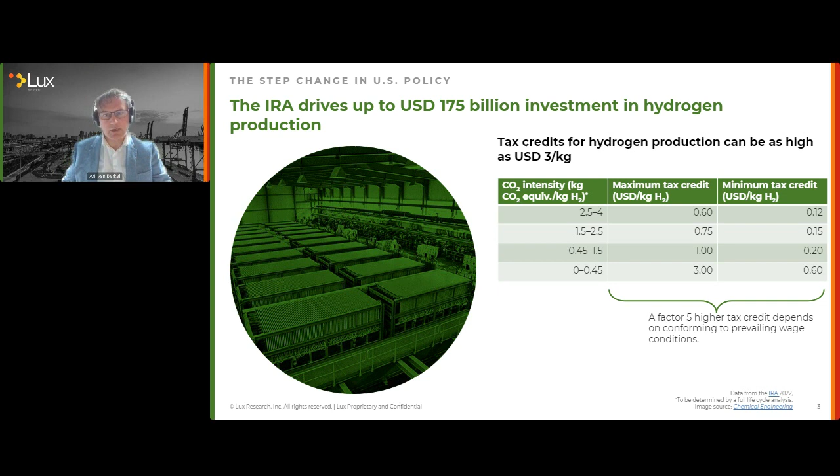Now, these numbers have been studied, for example, by the REPEAT project, which is a project at Princeton University. And they estimate that this could drive up to $175 billion of investment in hydrogen production. Now that's all nice, but of course we want to know how much hydrogen that actually amounts to. Well, to get to such a low CO2 intensity, you have to source renewable energy for the hydrogen production. And of course, you can source that from, say, solar, which would get you a capacity factor for hydrogen production of maybe about 30%, 35% if you're lucky.

Or you could source it from hydropower, which could get you capacity factors even exceeding 80%, but I put 80% here on the slide. So you can see roughly what kind of annual production of hydrogen that investment could amount to. If everything is connected to solar, it would be roughly 10 million tons of hydrogen. If everything would be connected to hydropower, it would be 28 million tons of hydrogen. In reality, it will be somewhere in between, let's say, 15 to 20 million tons of hydrogen. So the US, through the IRA, is set to deploy capacity for about 20 million tons of hydrogen per year. And that's low carbon hydrogen, so not the gray hydrogen that's already being produced.

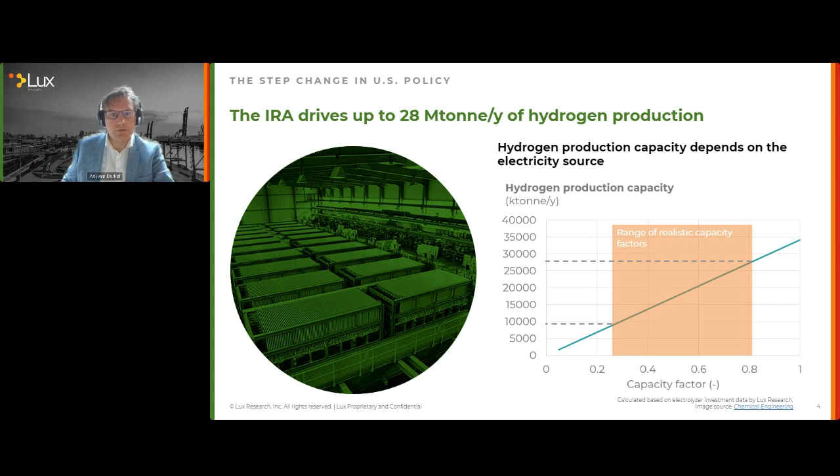So what about the EU? Well, the EU had a policy called Fit for 55, which was designed to create demand for at least 7 million tons of hydrogen by 2030. And you can see roughly how that demand is broken down here.

Following the war in the Ukraine and the need to have an accelerated energy transition in the EU, at least that's how the need to be less dependent on natural gas, and specifically natural gas from Russia, was interpreted in the EU, Fit for 55 was upgraded to the Repower EU package.

And Repower EU aims to create demand for about 20 million tons of hydrogen per year by 2030 across the EU. You'll notice that there's a big portion other, which could also mean we don't quite know yet where this additional hydrogen demand will come from, but we'll figure it out by 2030.

So if the EU needs 20 million tons of hydrogen, where does it get that? Because hydrogen, and the reason back in 2006 the hydrogen economy didn't happen, even though people were fervently working on it, hydrogen has a chicken and egg problem. There's not enough supply of hydrogen because there's not enough demand. There's no investments in demand for hydrogen because there is no supply being announced.

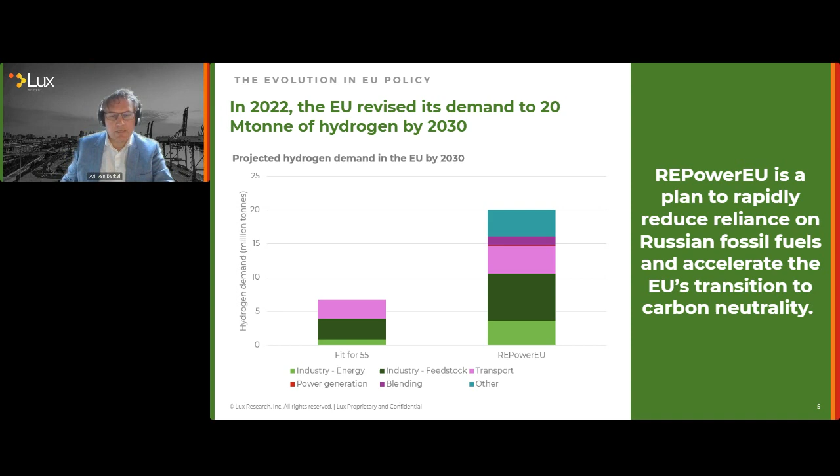So where does the EU get the 20 million tons? Well, originally in Fit for 55, the plan was to just generate hydrogen within the EU, local production. And 7 million tons of hydrogen production within the EU is not crazy. It could be done, for example, using North Sea offshore energy. However, 20 million tons of hydrogen per year is a little bit crazy for EU terms.

The EU needs hydrogen because it needs to import renewable energy. And therefore, the 20 million tons will, according to Repower EU, come 10 million tons produced locally within the EU and 10 million tons produced outside of the EU.

And now you can see that the EU is also working to close all sorts of agreements with other nations, nations that have a lot of, for example, solar or wind potential, in order to create terminals and import capabilities for hydrogen from those countries. And you could think of countries like Saudi Arabia, Australia, Chile, all of those kind of nations.

The EU does, however, want to export electrolyzer capacity. So it also wants to generate its own capability to manufacture electrolyzers so that even when hydrogen is being imported, the EU can still be the supplier of the equipment.

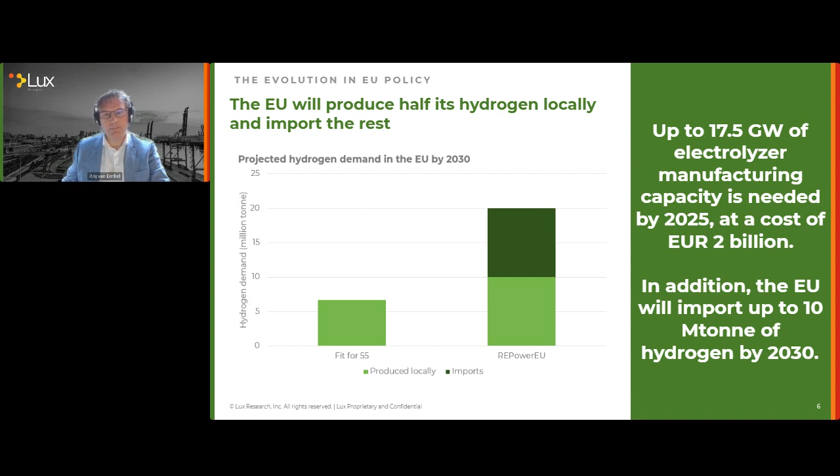And just to give you an idea about the local production within the EU, there are places like Spain and France that have abundant solar energy and wind energy. You will notice that both Spain and France have long coastlines and have a lot of ability to deploy offshore wind energy as well. But obviously, if you've been there maybe on a vacation, you know that Spain has more than enough solar potential as well.

Heavy industry in Europe is concentrated in a band that runs from northern France and the Low Countries through Germany to northern Italy, roughly. That's where there's a big concentration of heavy energy intensive industry historically and still today. So you'll see that the heavy industry band will be importing from other places in Europe, for example, from France and Spain.

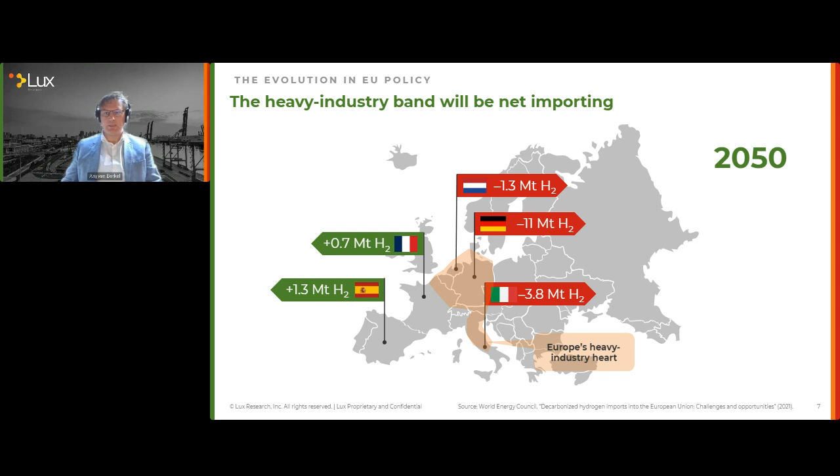And that's actually already being deployed right now, as there's a project called H2Med, Med for Mediterranean, which is building 2 pipelines with a combined length of about 700 kilometers to move hydrogen from Spain through France and towards Germany, and also from Portugal.

And it's not hard to imagine that that pipeline could cross the Mediterranean and get into Morocco, for example, and start also using the solar potential in Northern Africa. And that's an active debate as we speak right now. You may have heard about the deal with Tunisia about migrants that the EU closed. In those conversations, renewable energy plays a role as well.

So the EU and the US are on very similar tracks when it comes to scaling hydrogen, of course, for very different reasons and with very different instruments. And that's important to note, because you don't know if the capital that is required is actually being mobilized, right? These are plans. Now the governments need to create private sector funding for these plans.

And the US is doing that through a tax credit, which is simple, but not very flexible, but very simple and very easy for companies to understand and to count on. The EU is doing more complicated things, more open-ended, which means that it's much more flexible in terms of which technology gets deployed, but also it's much harder to mobilize private sector funding that way.

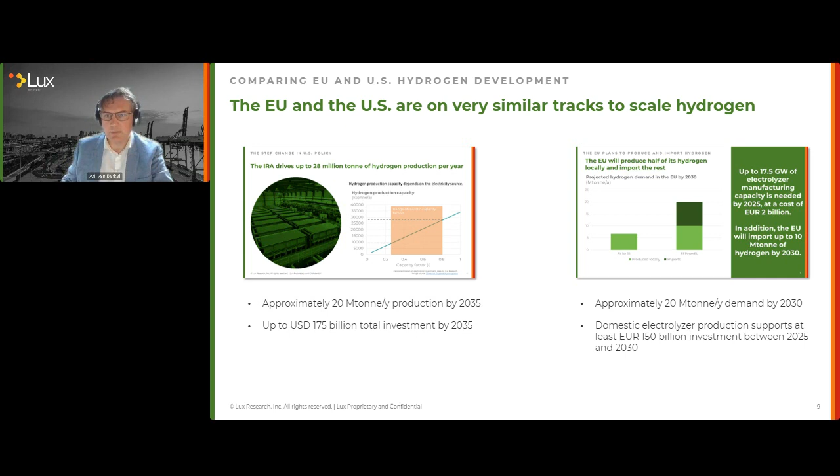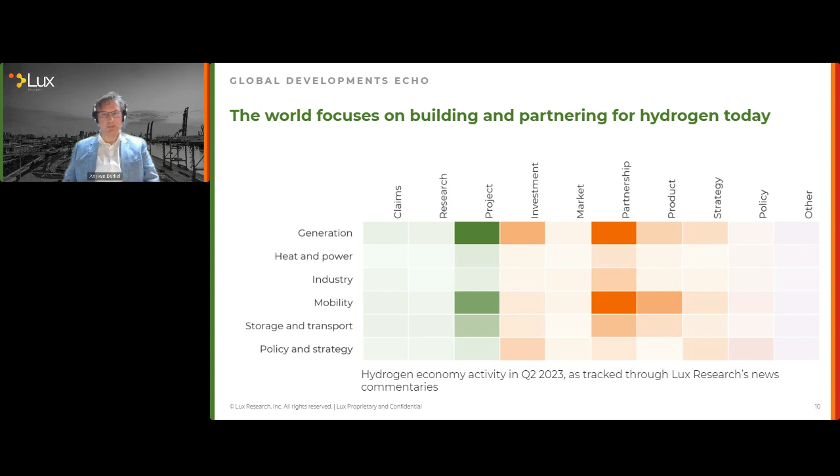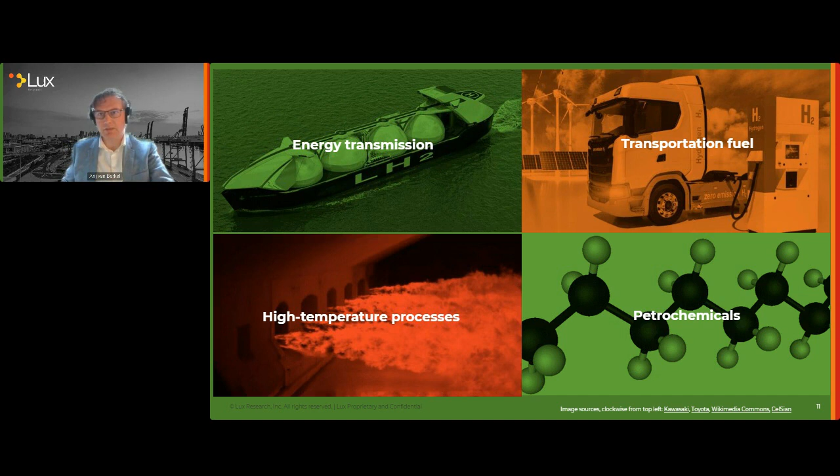We'll spend the rest of the webinar discussing that, and we'll look at four generic types of applications: energy transmission, transportation fuels, high temperature processes, and petrochemicals, and they're connected. So I won't make a clean break between all of these applications. I'll try and give you some structure, but you'll see that they're fluid. These are not clearly separated application areas, as you'll see in a moment. And we'll start with transmission.

Now, transmission is important because a place like the EU as a region needs to import renewable energy. It doesn't have enough renewable energy potential to generate all of the energy it would need for its current economy within the EU itself. And the same applies to Japan and South Korea, for example, and to a lesser extent to China. So it's important to move renewable energy around globally, and one of the main ways to do that would be hydrogen. But even if you're not looking at that, it's still important to transmit energy and to have a way to concentrate energy.

Fossil energy, whether it's a power generation plant, a combined cycle gas-fired plant, for example, or just a burner of fossil energy, like a massive glass furnace, those types of installations typically have a power density of about 1 gigawatt per square kilometer. Heavy industry, like a steel mill or a refinery, consumes roughly 50 megawatts per square kilometer. And that's never a problem because fossil energy provides a very dense source of energy.

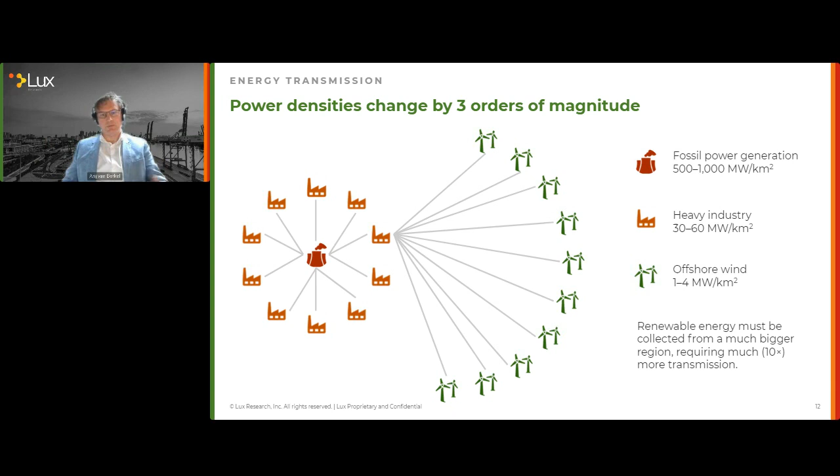Another way to look at it is to look at land-dependent industries versus just fossil-dependent industries that do not depend on any significant land space to produce the energy and the raw materials. So if you look at ethylene production, which of course is completely a fossil industry product, this is one of the cracker sites in the Netherlands. It processes about 1.5 million tons per year of carbon, right? 1.8 million tons per year of product.

If you look at a paper mill, and especially a pulping mill that processes wood, and therefore has a raw material that needs to come from the land, it processes about 122 kilotons per year. So about a factor of 10 less carbon per year, and 250 kilotons of product per year. And of course, the product is more because biomass tends to have a higher oxygen content.

Potato starch, very similar. It comes from the land. It is a highly efficient crop, but still the carbon processed is only about 270 kilotons per year, which is still a factor roughly 5 less than what you get with a pure fossil production unit.

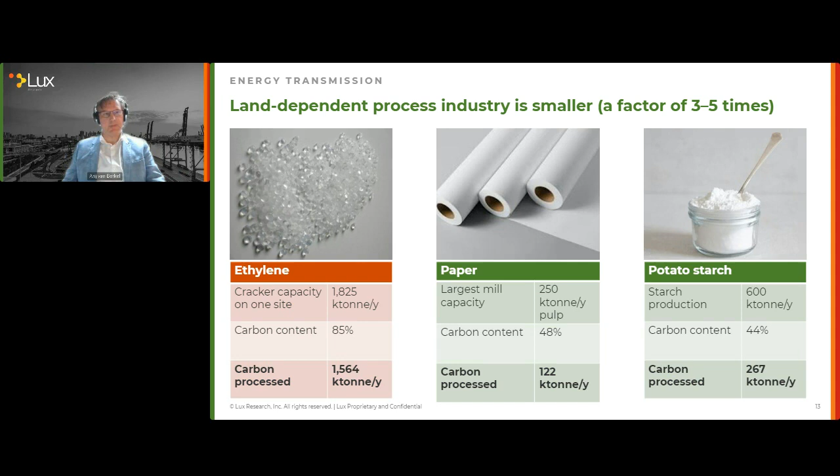So one way to concentrate is to use the existing natural gas network. And here's an example of a company called DiviGas that's developing a way to introduce hydrogen into the natural gas network and selectively take it out again at the point of use. So in this case, they develop hollow fiber membranes. So you can blend hydrogen into the gas network. Today, it's considered safe to do that up to about 20%. And then you can take hydrogen selectively out at the point of use.

Now, they're not quite at 20%. They can go as low as 35% today, but they're working to improve the technology. And meanwhile, the gas grid operators are working to increase the safe limits for blending hydrogen.

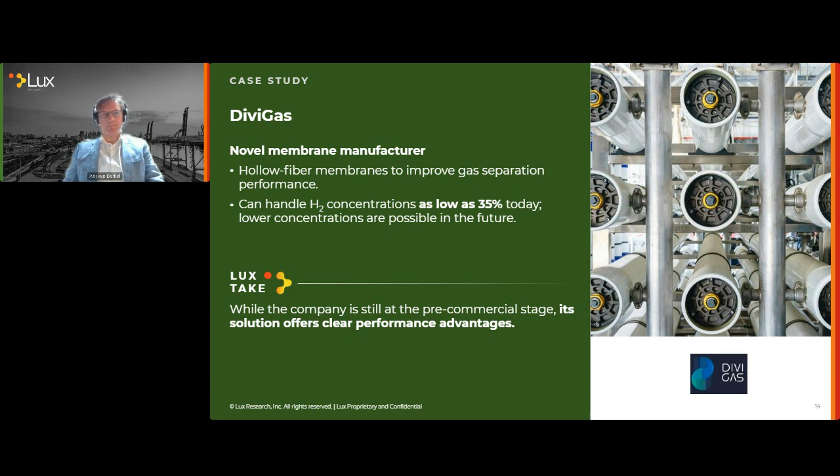So, getting back to the global trade, how would the global trade work? Well, you need a carrier, you need a way to move hydrogen around. And currently, the most considered carriers are liquefied hydrogen, so cryogenic, ammonia, or liquid organic hydrogen carriers, also known as LOHCs, which I used here because that's a lot shorter to put on a graph, of course. And as you can see, the cost of transporting hydrogen through any one of those carriers is pretty much the same. So there's not really a technical answer to the question which carrier is better.

So at the end of the day, we believe that really this is a standardization problem. The first terminals that get built at a large scale will be setting a standard for the hydrogen carrier. So if the first terminals happen to be cryogenic, then liquefied hydrogen stands a good chance of scaling and becoming the carrier of choice. On the other hand, if liquid organic carriers are the first terminals to be built at scale, then that particular carrier has a good chance of becoming the carrier of choice.

Ammonia is special because, you can see that the cost of turning ammonia back into hydrogen is significant; it is roughly half the total cost of the carrier. So if you could use ammonia as is, without having a particular desire to turn it back into hydrogen, it could be much cheaper. And this puts ammonia at an advantage.

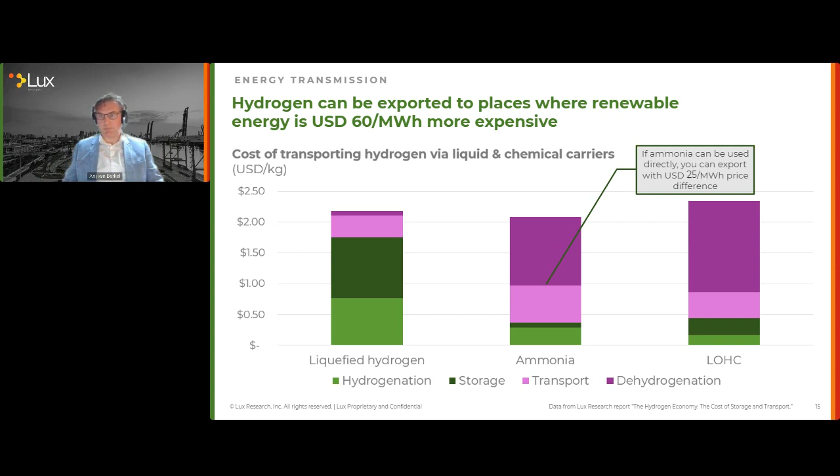So a lot of people are already working to make use of ammonia directly in an engine. And of course, that's the largest group of people. And you should imagine those could be large marine engines, for example, two-stroke engines. Using it in a turbine is not so easy, because in a turbine it's very difficult to handle the NOx emissions, or in direct fuel cells.

And of course, people are also working to burn ammonia. And burning ammonia without excessive NOx emission is actually possible and not even very expensive to do. But you do have to have a very good understanding of the combustion process.

So that brings us, and I told you, things are blending a little bit. So now we're moving over to high temperature processes. And what you can see here is a US 2018 census on energy use in industry. And you can see energy use broken down here by the typical temperature range that the industry uses. So for example, glass manufacturing uses a temperature above 1000 Celsius. So it's in the ring at the top left of this picture, the over 1000 Celsius ring, together with steel and cement manufacturing, for example.

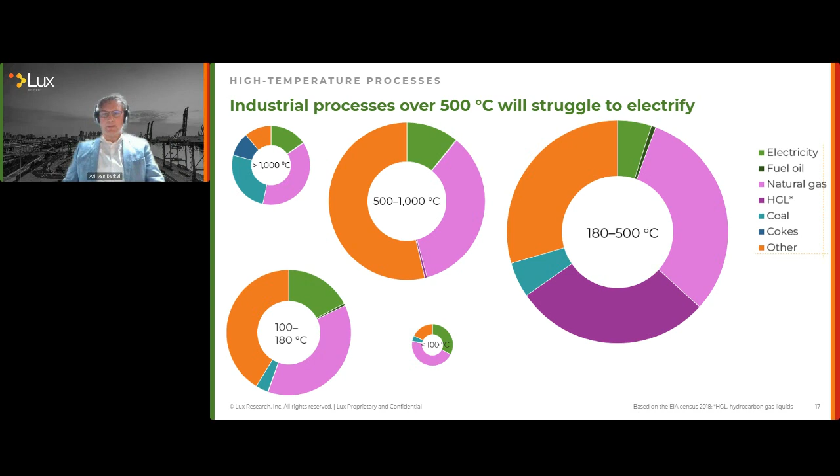Roughly 75% of industrial energy use in the US, and I think that's pretty representative for global energy use as well. That's industrial energy use, not all energy use, occurs in industries that require very difficult, like over 500 Celsius, or somewhat difficult, like between 180 to 500 Celsius, to electrify heat. And therefore, burning ammonia to generate heat, for example, or burning hydrogen to generate heat is a relatively accessible, early potential application of hydrogen at a large scale.

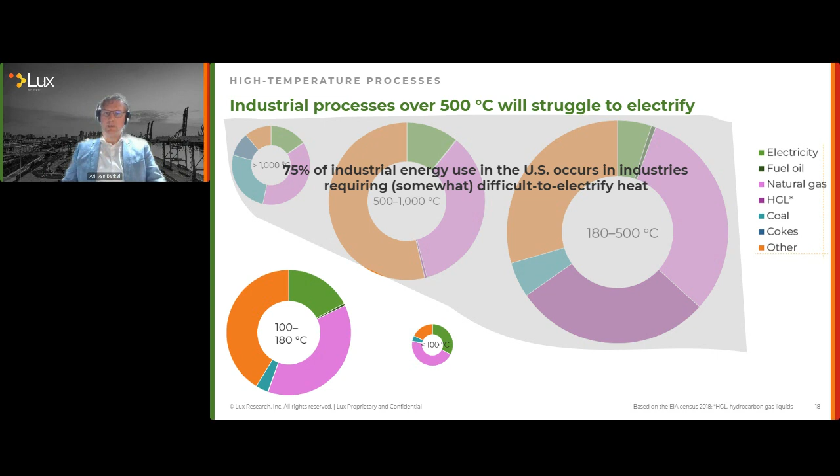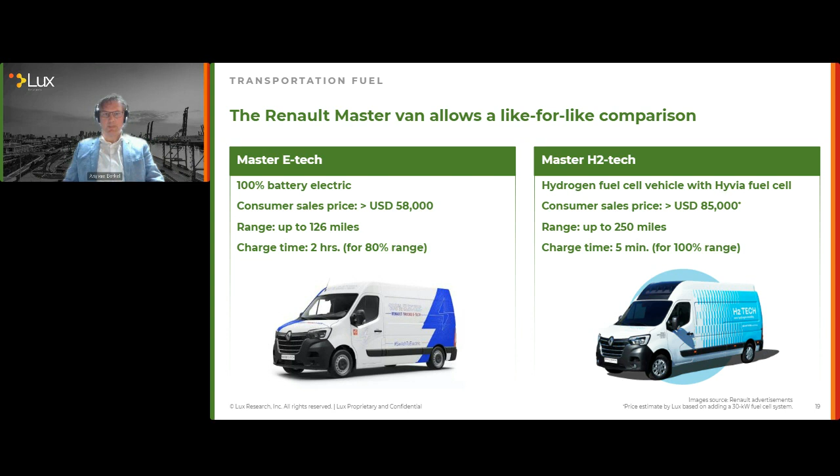For the hydrogen vans, you could do 5 minutes of charging for 10 hours of driving. So basically fill it up for every shift and then go. That would put the maximum utilization at about 99%, or for all intents and purposes, 100%, which would mean that in ideal circumstances, and circumstances are rarely ideal, you could buy 2 hydrogen vehicles to do the job of 3 electric vehicles. And given the difference in purchasing price for these, that's a very precarious business case, which means that hydrogen is basically too expensive for transportation.

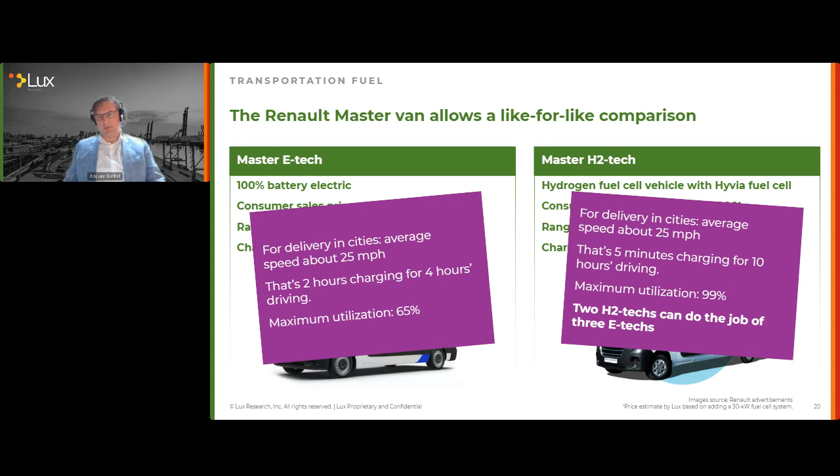If you do want transportation for hydrogen, you need government intervention. And we have a lot of examples where governments have used taxation, tax measures, and those kind of things to modify, to mold the fuel mix on their streets. Right? European governments have a rich history of changing the tax rules so that there's a mix of diesel and gasoline cars on the roads in order to support the product mix of refineries, for example. So that's entirely possible, but if you're curious about hydrogen mobility, look for some sort of government aid for hydrogen. And I would look for that in Japan and Europe rather than in the US.

Finally, we need to talk about chemicals and fuels. Hydrogen as a feedstock, right? If you have hydrogen, you combine it with carbon, let's say in the form of CO2, you can make all sorts of interesting products like methanol or like jet fuels. And then of course there's some products in here that depend just on CO2 and don't require hydrogen, like precast concrete, for example.

So we did a very extensive analysis at Lux Research about the potential for such production. And our conclusion was that the tipping points for these type of CO2 to chemicals or CO2 to fuels type of processes are about 10 to 15 years away still. So there will be a large future market. Look at jet fuel, for example. It's a very large future market, potentially for hydrogen, but it will take about 20 years for that market to become competitive with the incumbent jet fuel market.

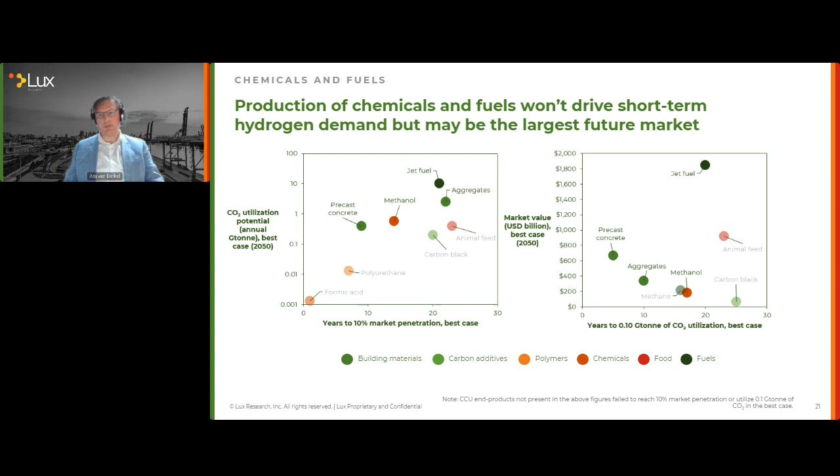So summarizing, hydrogen is a good way to move renewable energy, both concentrate renewable energy and move renewable energy between countries and regions.

A lot of hydrogen is focused on mobility right now, but that's a precarious business case, and therefore you need to watch for government aid if you're betting on that. But industrial use will initially be driven by heat, and that is a much less precarious business case and could be really interesting in the short term. If you're looking for chemicals and fuels, it will take another 10, 15 years before those become a reality.

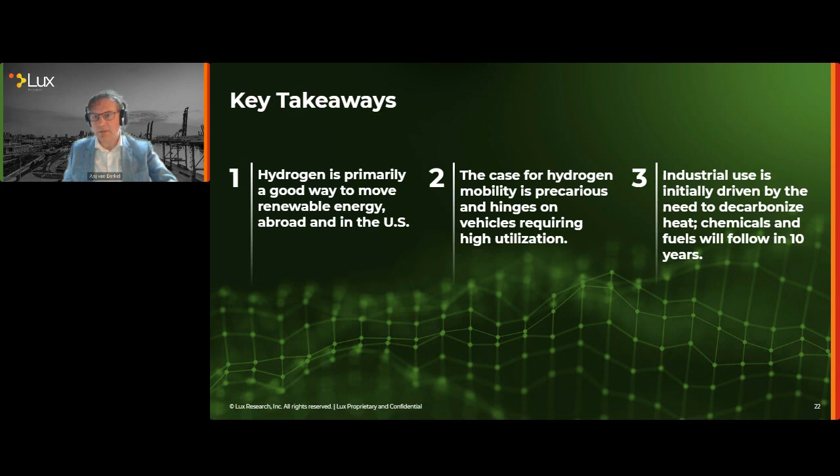So I think an interesting one to start with, Arij, is you kind of talked about this mismatch between the energy density of industry versus renewables. So someone asked, in the longer term, do you see industry moving closer to the source of energy rather than the effort to move the energy to the existing industries?

Right, yeah, that's a very tough question to answer right now. The problem is, you could say, well, if it only depended on energy, sure, industry should probably move to where energy is cheapest. Why move the energy around if you can move the products around, especially if energy is as difficult to move as hydrogen or electrons, for example. However, it also depends on things like carbon. Where's the carbon coming from?

And a lot of places that have cheap renewable energy, like say a desert, the Australian outback, have a marked lack of chimneys. There's not a lot of CO2 being produced over there right now. So then you are quickly turning to the question of direct air capture, which is very expensive at the moment. So really, I think it will be a mix. Looking at Europe or the US, I think both those places will export less chemicals. So a lot of the chemicals production, petrochemical production or hydrocarbon production will occur closer to the market.